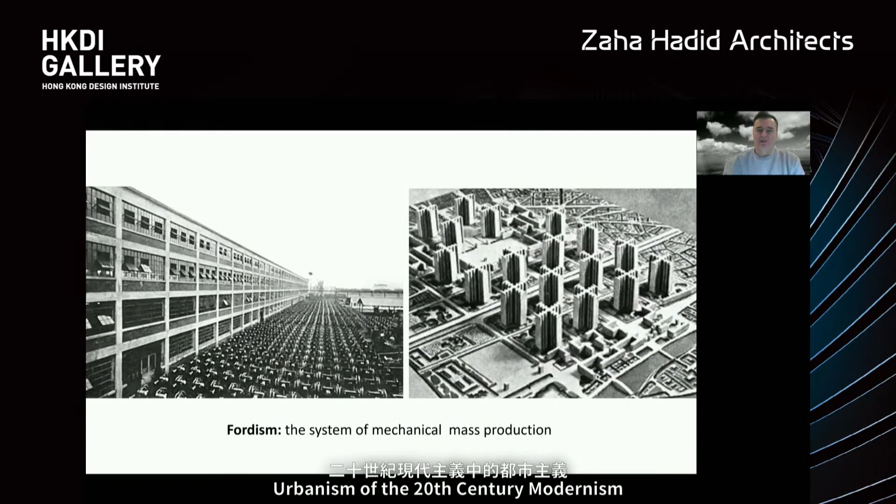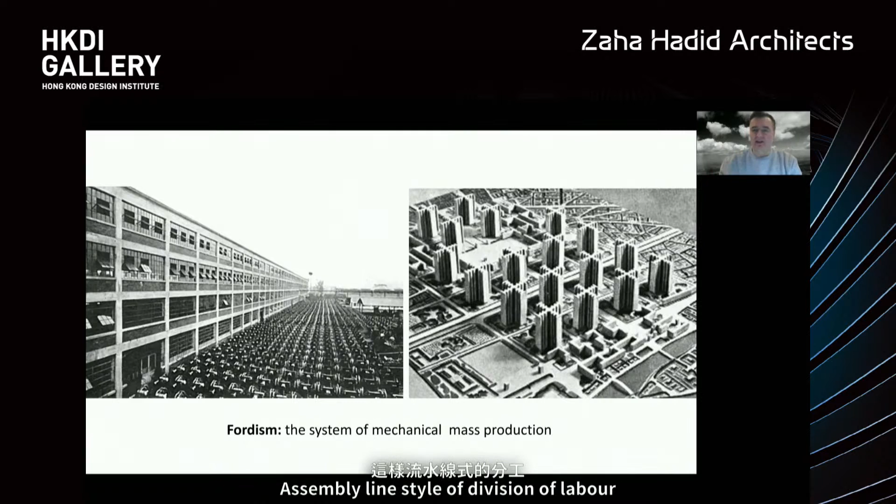Urbanism of the 20th century, modernism, was premised on the industrial city of mechanical mass production. It implied also zoning, separation, specialization, pulling apart the city fabric into specialist domains, because there was a very stable division of labor, an assembly-line style of division of labor, not only in the factory itself but also across domains and within administration, which led to this kind of model being viable and reproduced around the world.

And indeed, the vision of, for instance, a city for 3 million inhabitants, which Le Corbusier sketched in 1922, became reality around the world. For instance, you can see it in Moscow in the 70s, 80s, and 90s.

There's a stark contrast as we move from this era of, let's say, repetition and simplicity of organization, relatively speaking, to what happens now: complexity and agglomeration of individual statements in a place like, for instance, Moscow City.

It's a big difference, and the difference reflects a difference in socioeconomic dynamics and patterns of life and work and collaboration. So we're moving from that static hierarchy, which is bureaucratic, demarcating zones of competencies from a top-down hierarchy where every piece of information is channeled through hierarchical supervenient nodes, versus a network, which is much more about lateral flows of information and self-organizing of differentiated competencies.

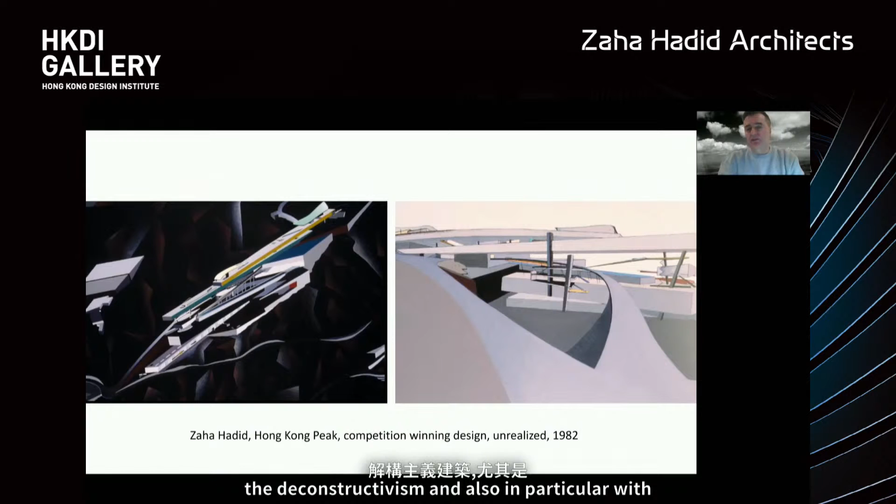These transformations started in the late 60s and into the 70s, and became quite prominent and prevalent and well reflected already in the early 80s. They also connect up meaningfully with the neoliberal transformations and revolutions of around 1980. Although these were not conscious elements, what was fascinating for me with the project of deconstructivism, and also particularly with Zaha's dynamic and complex work, was the anticipation of the kind of space which would fit such a situation.

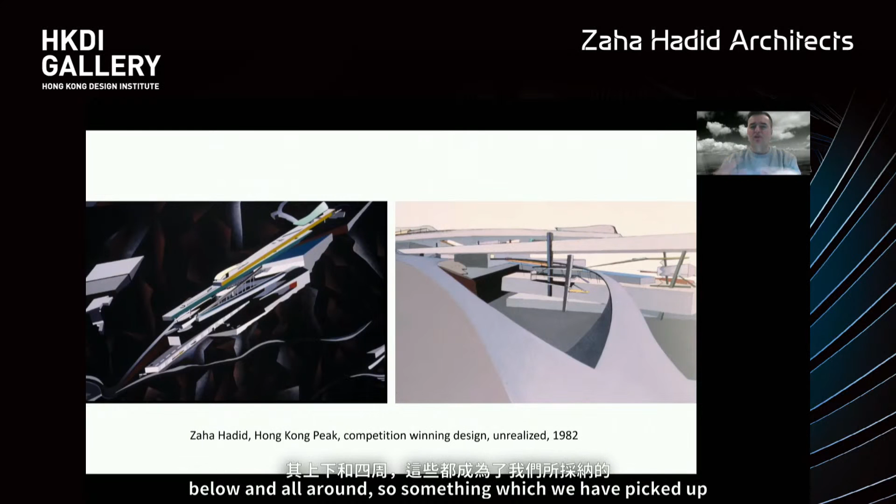Postmodernism already gave hints, an idea of postmodern space as a layered space, where old layers onto new layers onto old. But particularly here we're seeing nearly not a vertical urbanism, a horizontal skyscraper if you like, but the element which Zaha was most proud of and referring to continuously is this idea of a void, of intervisibility, interawareness, of flows, of movement, buildings that are porous, where there's offerings above, below, and all around. So something which we picked up and worked with also with vertical structures, where this became possible only later.

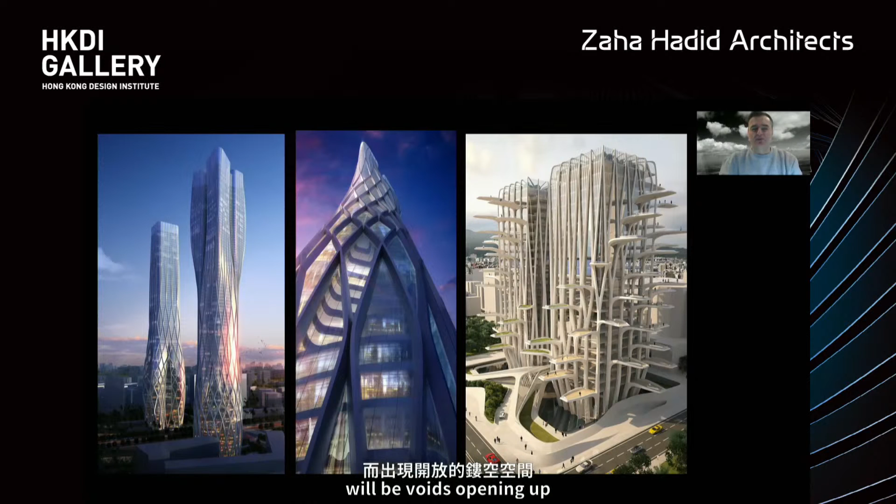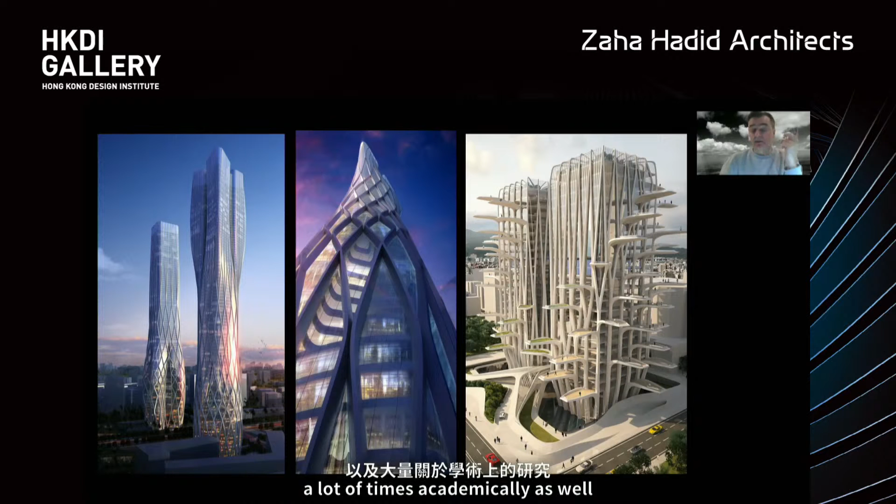So vertical urbanism means sometimes expressing structure, differentiating structure. Towers, the program isn't just extruded and stacked. So there will be different conditions, there will be voids opening up, and for that the structure needs to adapt and evolve and make space and be on the outside so the inside is more free. It's a hypothesis we've worked on a lot of times academically as well in the AA design research lab and elsewhere.

And so there's a number of those ideas, sometimes very tall towers, and you can see there's a differentiation between bottom, middle, and upper parts of the tower. They're quite different in the way the forces are accumulating, both vertical and horizontal forces, and that becomes also an opportunity, and this is reflected also in programming differently.

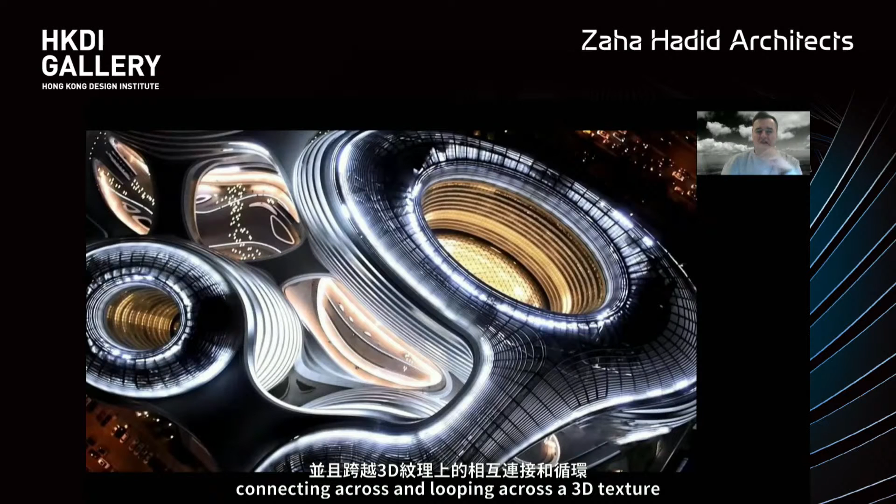And so Galaxy is that project in Beijing where it's maybe not super high, but it is a full-on three-dimensional urbanism with a lot of exterior public atria spaces, interior atria spaces, and bridging, connecting across and looping across a 3D texture that is, I think, quite an exemplary project we're still very proud of.

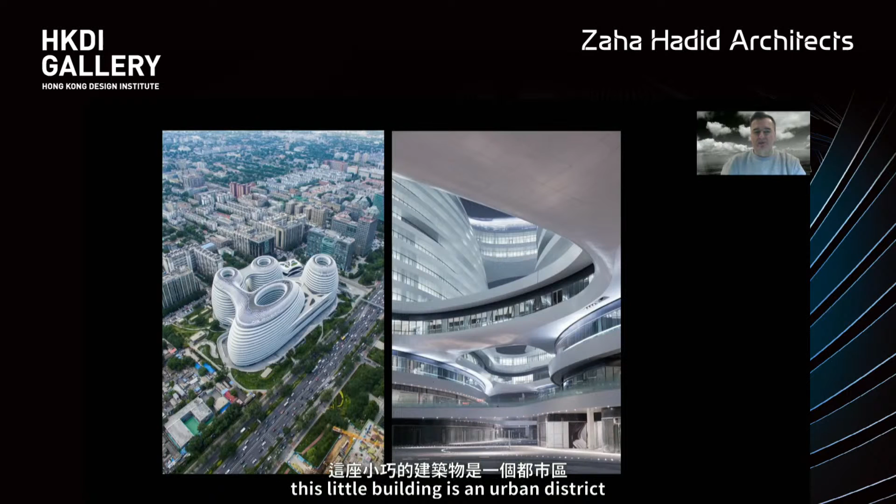Our own office, Beijing office, is located within this urban nugget, this little building is an urban district, interior urbanism, we also sometimes say. And you can see here the exterior space, the way it's stacked, the way vistas flow and activity is below, above, and all around.

Major urban plaza. There's co-working here. There's a lot of small companies, thousands of them, perhaps hundreds at least. There's a lot of cafes, bars, food and beverage offerings in the retail component, which is basically a social hub. There's also co-working zones embedded in the retail zones, and the various atriums, and we paid a lot of attention to openness, open vistas, intervisibility, awareness are the key themes.

And then with the same client, we made an attempt to create a larger cluster of towers. I only want to emphasize here the big atrium, because that's the theme which later came through—a big atrium which goes up the tower, but also opens up to the city.

Twin Tower project in Nanjing. Again, there is a big conferencing center and podium and three-dimensional urban plaza, interesting lobby and atria spaces on the inside, with big gathering spaces embedded in the podium, etc.

So these are our towers. We started actually with the first tower we ever built, in Marseille for a big shipping company. It was interesting, also bridging and connecting the horizontal building, and that level was used for seminars and meeting rooms, stacking up in the center where the plan became deeper, and by the blade kind of edge, with some elevators running up on the edge panoramically, and some atrium style spaces in the bridge level condition.

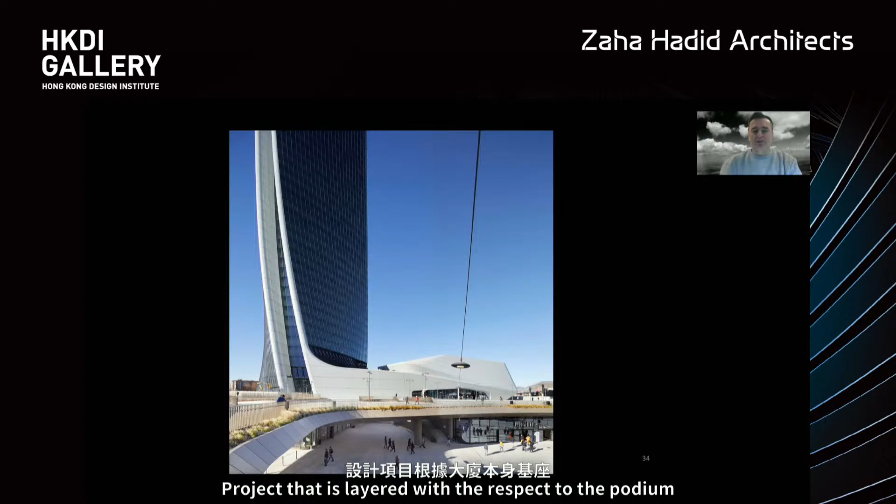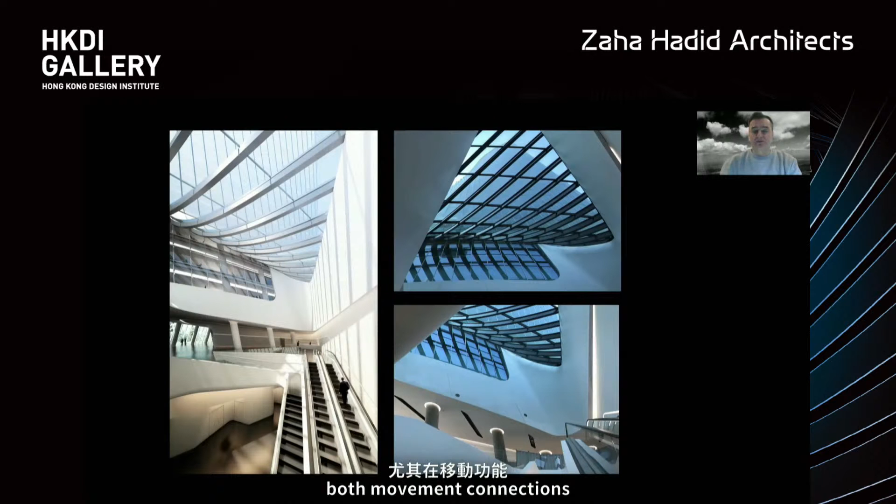Next tower, the Generali headquarters in Milan, connecting up with a retail condition and also connecting into residential quarters. The building twists to meet ground conditions and then to meet an internal axis lining up with the urban axis. Quite a dramatic project, but layered with respect to the podium, outdoor spaces, infrastructure, and the train stations close by connecting into us, with connections across sections, both movement connections and visual connections.

I was talking about structure and structural differentiation in our towers. This is in Miami, a residential tower. It has a series of activating elements: a strong activated ground with restaurant and lobbies, then a pool deck with amenity spaces, then residences on top, with another series of social spaces interspersing, and the rhythm of the structure gives also a differentiation into 3 flats, 2 flats, and a single flat on top.

And different balcony conditions, corner balconies, middle balconies, etc. The entrance has generous lobby spaces, and the pool deck, where the structure also reveals a series of intermittent niches and opportunities. Then moving up the tower, we're looking at the corner balcony, as well as the big large flats with a full stretch of frontal balcony overlooking the bay. Beautiful spaces where you can live as much on the terrace as in the interior.

The structure opens up and splits at the corner to open up vistas, and then a double height space at the very top for social gatherings and functions, with beautiful ceilings, a pool deck, and then connecting with air traffic through the helipads.

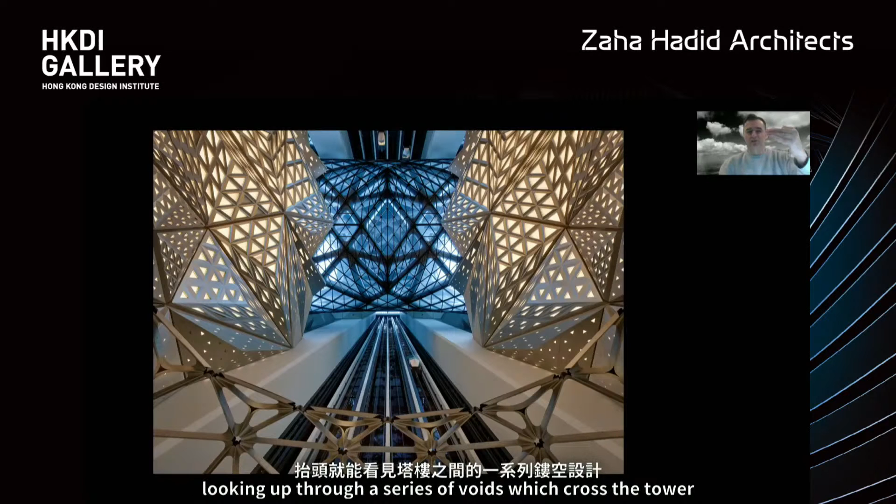Morpheus, a big hotel embedded in the City of Dreams in Macau. An exoskeleton allows for a lot of really spectacular interior atrium spaces stacked up, again with a lot of connections to the city. So our atriums are never fully interiorized. Panoramic elevators make it really a fantastic experience, looking up through a series of voids which cross the tower, with panoramic elevators on both sides, and then these amazing suspended platforms.

There's a restaurant, you only see part of it here, and there's another suspended space which is the breakfast room. All along, there are views and vistas across the towers into the urban condition. The breakfast room higher up, another view into the restaurant, and there's a gallery space as well, with a pool deck on top.

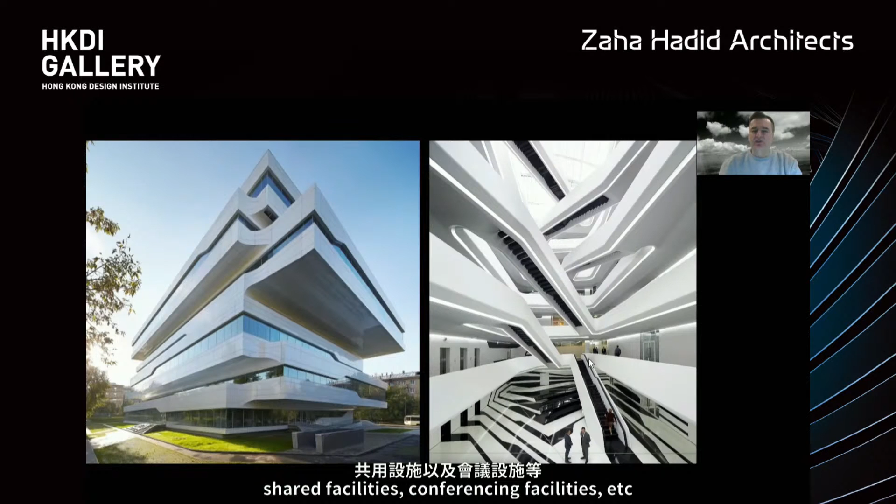I'm showing you everything. But we started also with smaller towers with this idea of an integrating, light-flooded atrium, where collaboration between different companies happens. It's not a single company, but one that creates network conditions here with wide corridors and shared facilities on the ground, conferencing facilities, etc. I think it's quite a striking, animate space as a work environment, very stimulating because it's networking for the network society.

And the mega atrium pushed another level with the Soho China Leeza Tower in South Beijing, where we again emphasize a lot of transparency into the urban, looking between the sides rather than being blocked by core, and having a series of bridges connecting in between as well. This interesting twist has to do, again, similar to the tower in Milan.

There is a cut through the basement, a train running through, so that's why we in fact have to split the tower to some extent, and then twist into the axis of the big road. So there's this kind of interesting mediation, but it also gives a lot of play and modulation to the surfaces, viewing up and down those three-dimensional surfaces where things tilt into view. It makes for not only excitement, but for more intervisibility, and a lot of transparency is achieved through that. These big urban windows are not just on one side, on both sides, so you sometimes see right through the tower, which I think is very exciting.

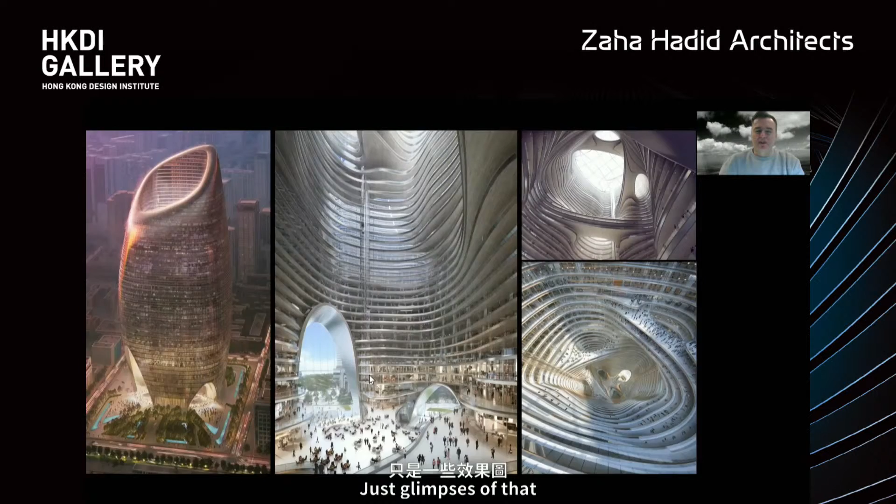Wow, so this was something. There's similar projects in our portfolio. This is for Taikang in Wuhan, a big conglomerate, where we experiment with this kind of scale of atrium. Just glimpses of that. There's a few more in our portfolio, unbuilt, but perhaps to be built.

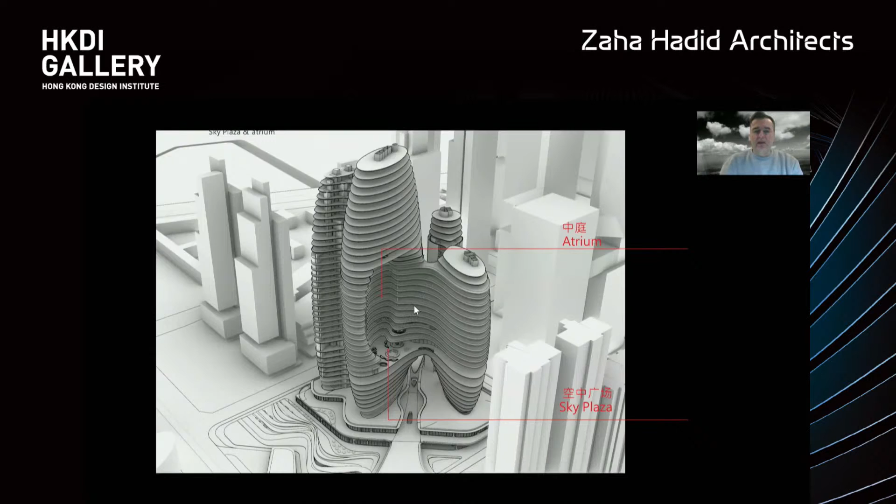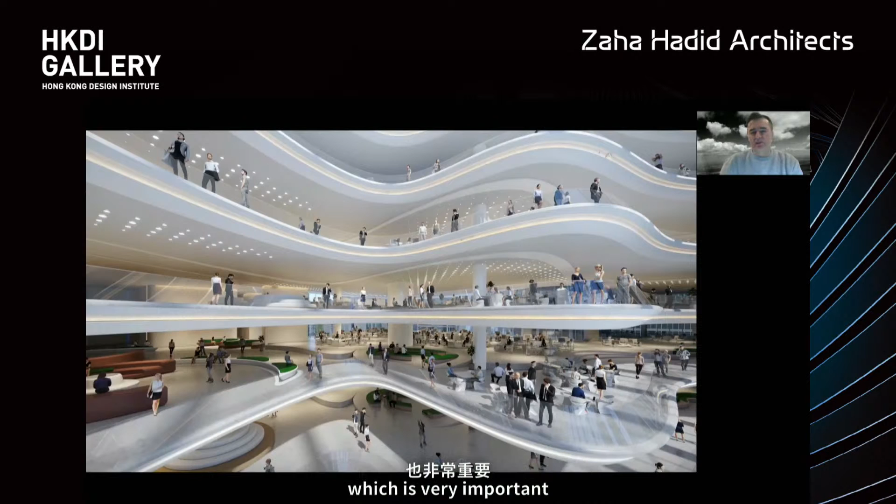This one is fascinating. It's a cluster of towers making one headquarters for Oppo in Shenzhen. One of the towers is actually purely circulatory, to open up the plate and not have the core, which we always say obstructs communication on the plate. We can then scoop out a big atrium and have the big views, big facades, true curtain walls, which are not clinging to each floor necessarily, and an amazing sense of openness and transparency.

This is very important, connecting up intervisibility, into awareness, networking, within larger companies with respect to departments and projects, or within buildings which host many companies which might cluster together according to their co-location synergy urges. And that's very important. Co-location synergies is really what brings cities together, agglomeration economies are not only about sharing amenities, it's really about collaboration, networking up, information exchange, and in fact project collaboration.

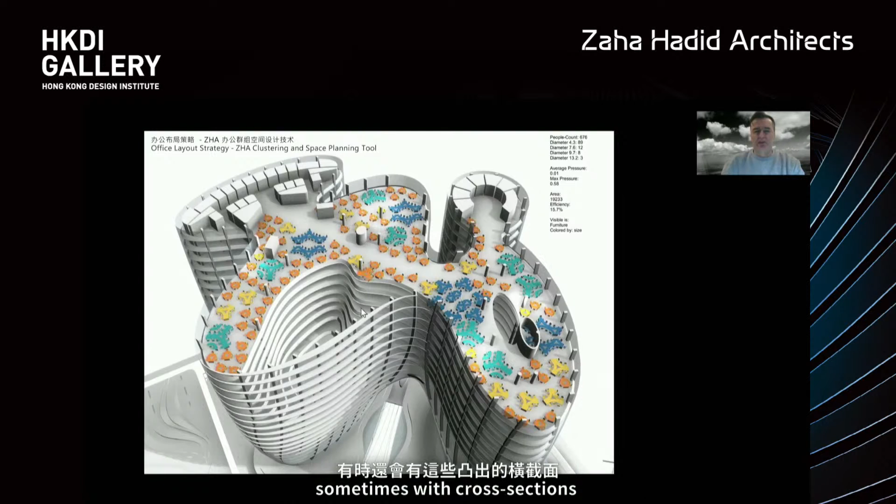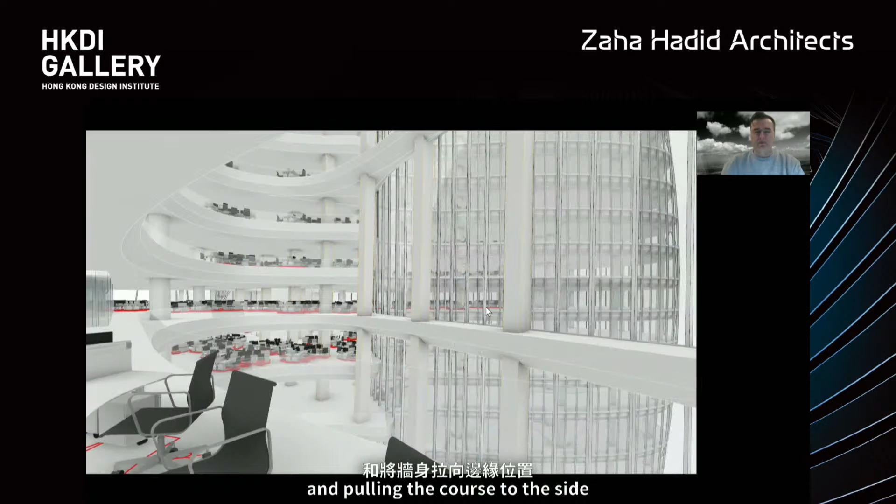So here you can see the total openness of that plate, sometimes with cross sections and pulling the cores to the side. Beautiful seamless facade.

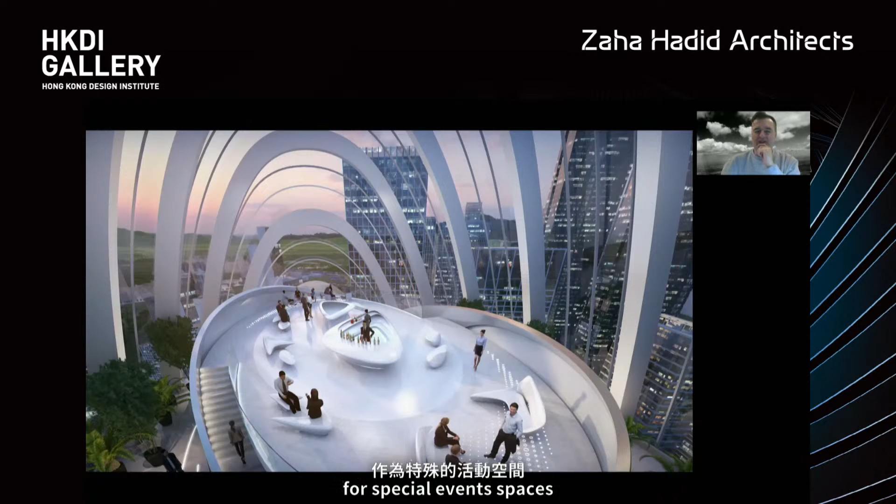Top of tower, I mean, we always exploit it for special event spaces with fantastic vistas. And we have several of these opportunities. One major one which we're going to exploit.

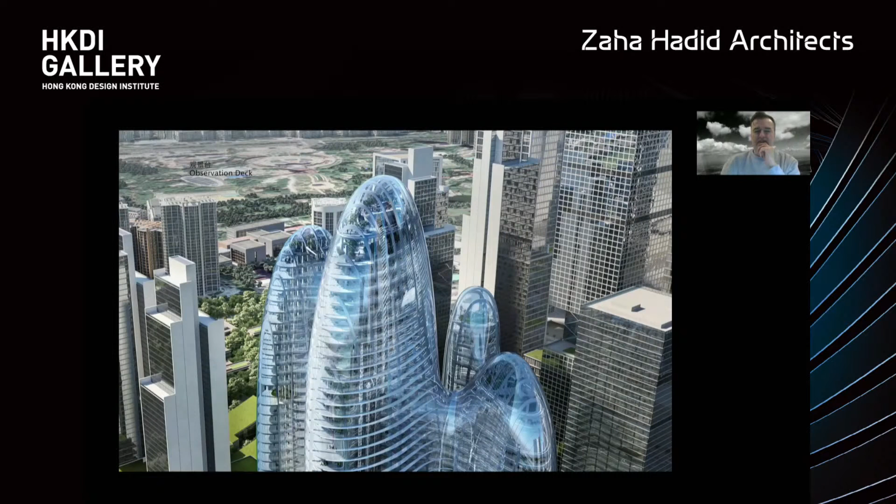This is an amazing tower, twin tower with a lot of bridging again and atria, but also terracing into the park with retail, food and beverages, places of exhibitions, spaces, galleries, cinema complex. It's a real city within the building, an interior urbanism, an urban building in the true sense.

Amazing project where we push into visibility, into awareness, and this idea of connecting up on multiple levels, not only on the ground, but also on mid-level. I think it's very important. And then top of tower again, very special occasions.

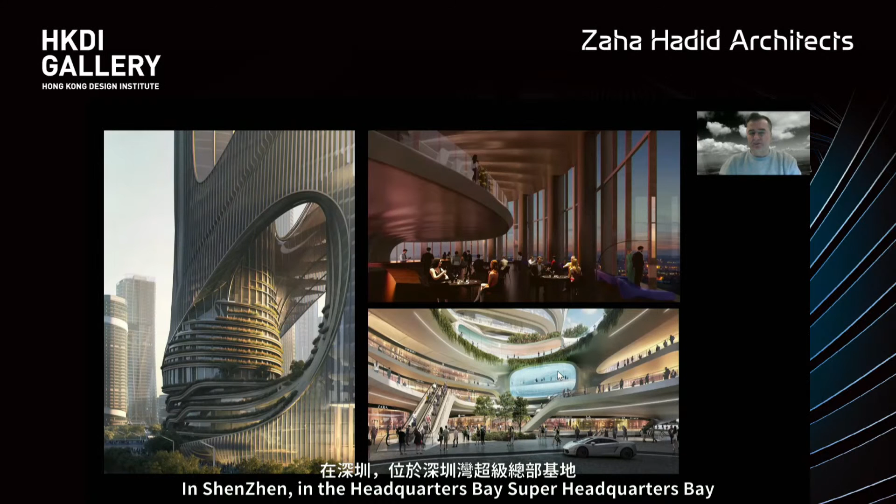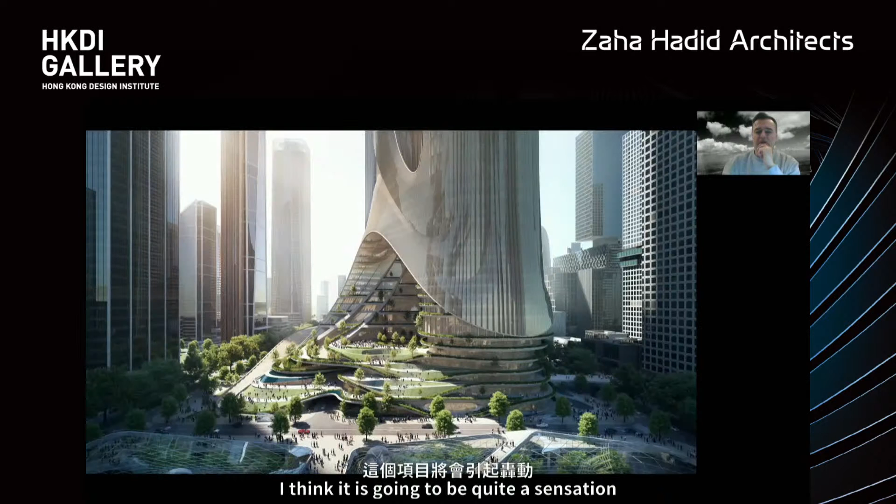In Shenzhen, in the headquarters bay, so super headquarters bay, also where Oppo is located. I think it's going to be quite a sensation.

Streets pulling through and in, you drop off and can move up the terrace on the outside or move through interior atrium access.

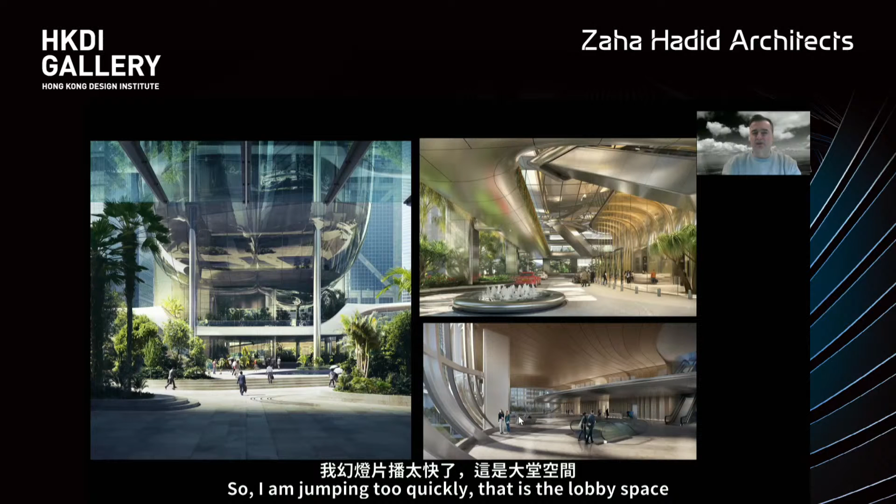So these are beautiful spaces. Sorry, I'm jumping too quickly. That's the lobby space, the drop off, and the bridge which connects into the urban network,

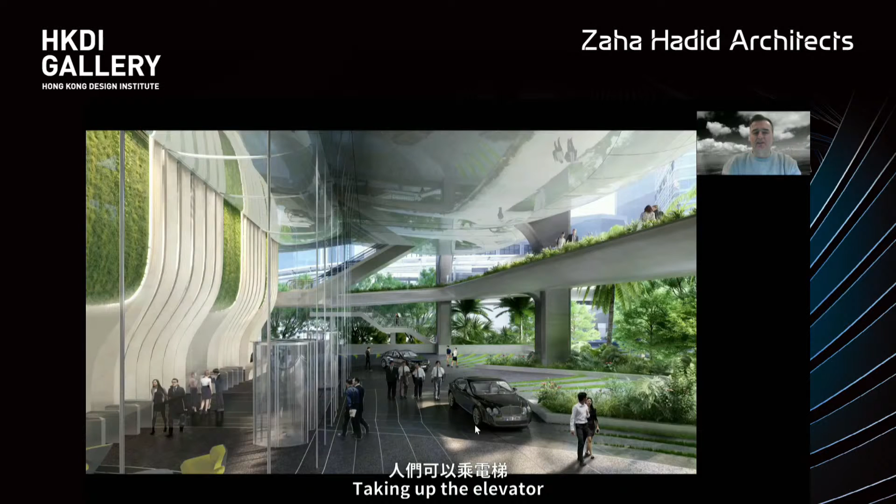taking up the elevator and coming up, or an escalator coming up to the double height large lobby with the balcony level again. So we can cascade up with escalators up to this point, and then take the elevator up to the levels,

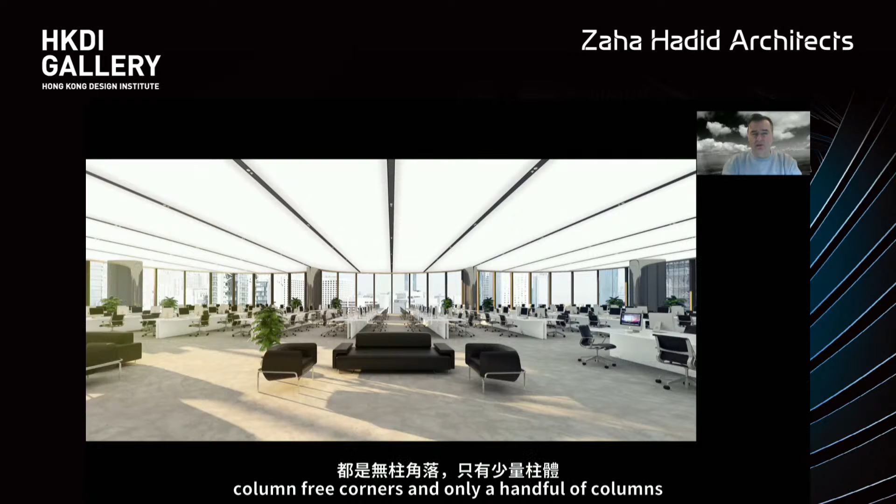which are really these amazing, just panoramic plates, because the core will be behind you, and there's an open vista and column-free corners, and only a handful of columns, mega columns, holding up the building.

Higher up, these recesses with green terraces, and at the top a fabulous event space, ballroom, with generous terraces, double height, glass roof, etc.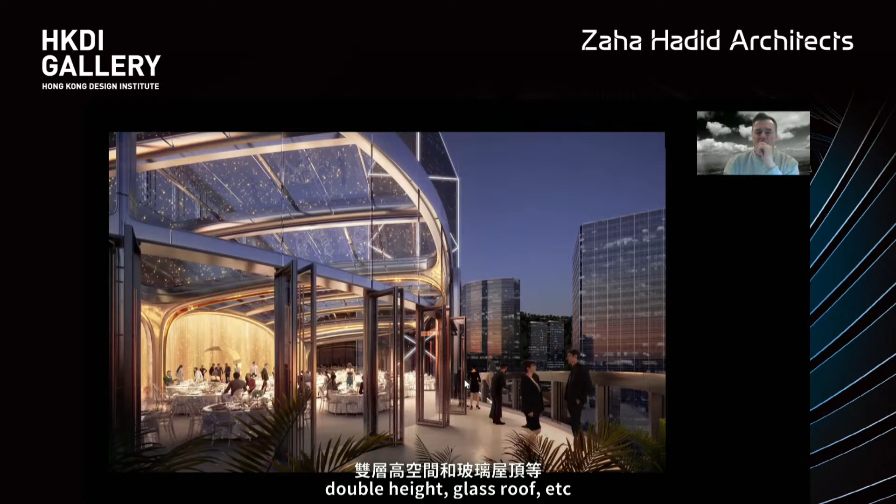Quite an addition in terms of a beautiful social space for Hong Kong, and that's the most central place. I think it will be the most popular and most sought after venue for special occasions in Hong Kong.

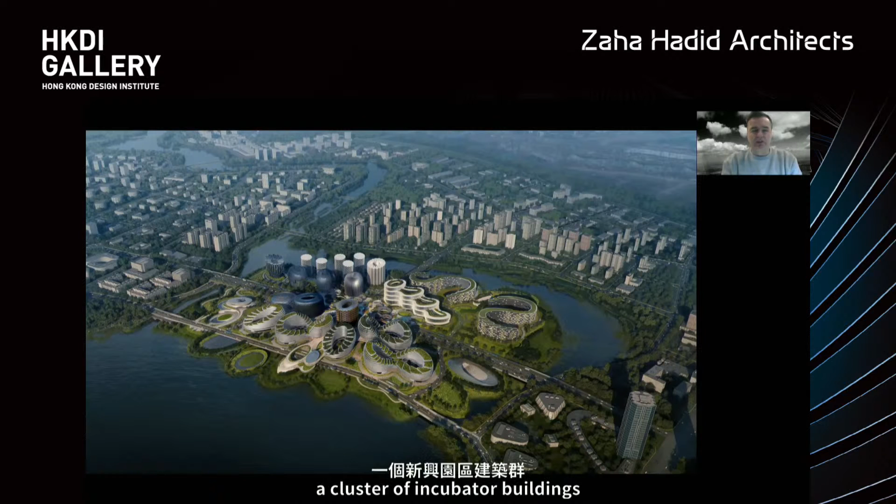Moving on to more urbanism proper, some of our sketches, and this is actually under construction now with a series of higher buildings, in fact, the so-called Unicorn Island in Chengdu, a cluster of incubator buildings for the tech industries, for startup companies with great potential.

There's also residences, there's a big urban plaza covering the road, so the site being dissected by a big road that just leads into underground parking, underground access, and a full-on pedestrian world on top.

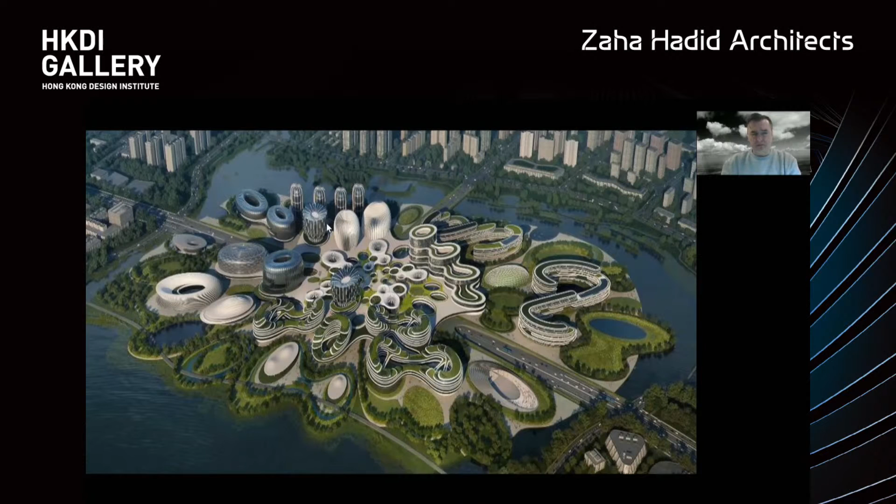First building built, an exhibition building, with a lot already under construction. So here you see it with taller towers pulling out now. The plaza is here. Some special buildings.

We try to do a lot of variety, the unity across difference, which has also an overall sense of unity through the overall centrifugal figure, but also through the cylinders and oval forms, and the terracing, for instance, which is a recurring feature which unifies

that project. It's very green. It's like a garden city, but much more dense than what one would expect to see under the heading of a garden city. But the green terracing makes it feel like a garden city, and also the proximity to the water,

I think, is compelling. And you can see here that there is a certain amount of density, but also a lot of beauty and activation through public spaces, green spaces.

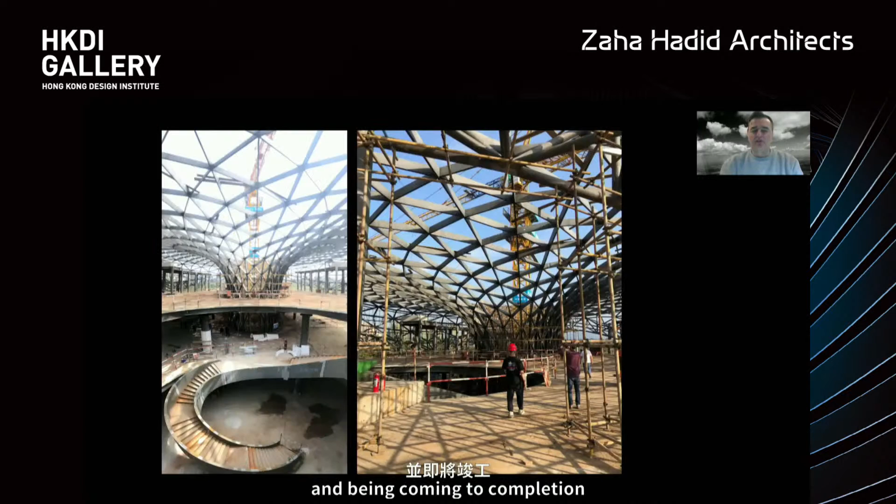The first building, as it was sketched, under construction, and coming to completion. These are not even the latest images. So there's a big exhibition pavilion to kick off basically the startup and unicorn village.

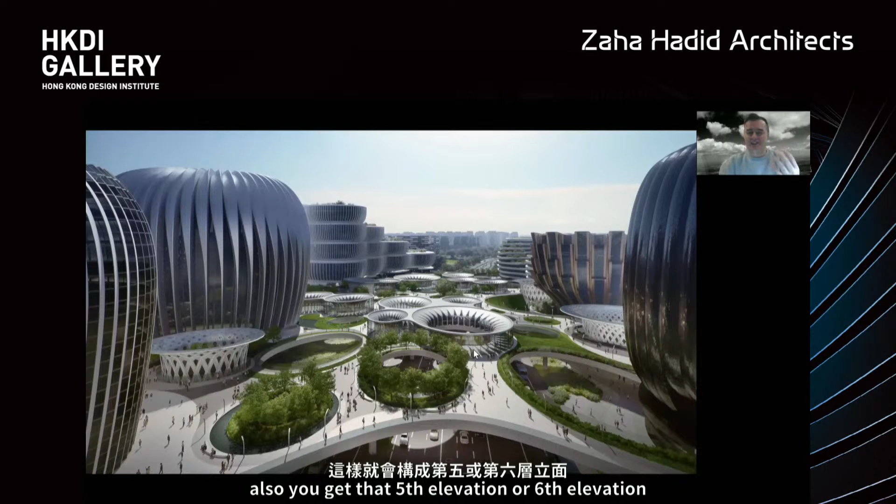Some beautiful spaces. And then the big urban plaza covering a lot of pavilion activation and some light wells as well, so that the street underneath isn't all dark. So you get that 5th elevation or 6th elevation, because you have an underside as well as a top view, as well as the 4 elevations.

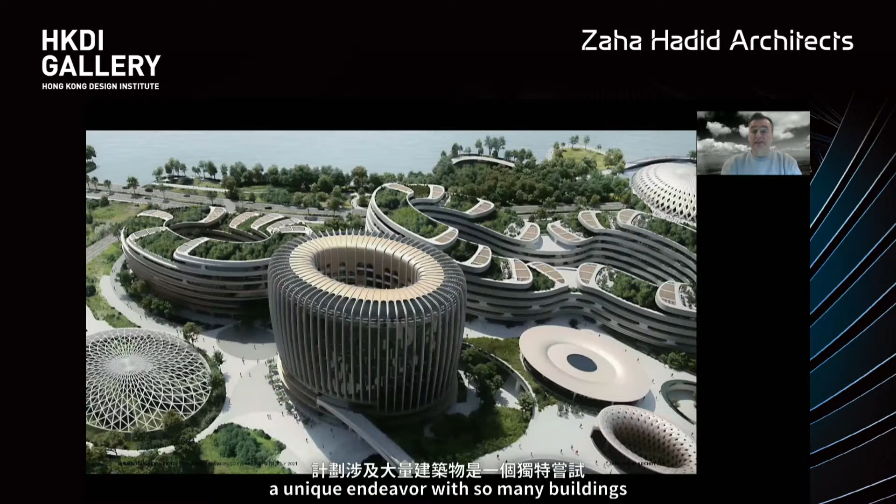So I think this is quite a unique endeavor with so many buildings, a big team trying to differentiate and have nuance and articulation. So differentiating residential from office building, from cultural buildings, etc., but having a lot of unity across all of that.

So it's a big effort, a unique effort so far, and I wanted to show this and also say anything larger would need multiple authors, but hopefully coordinated so there remains a unity across the variety, and not this kind of visual chaos where there's no unity and maybe a menacing kind of collision of styles and figures. So I want to finalize my talk with showing this work.

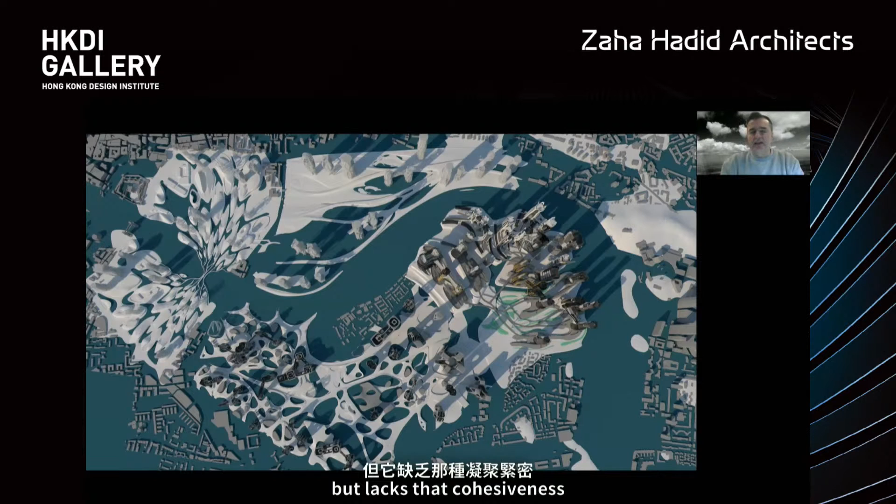It's the direct challenge to the City of London, which is in a way amazing, an intense cluster of vertical urbanism, but lacks that cohesiveness and becomes menacing and disorienting.

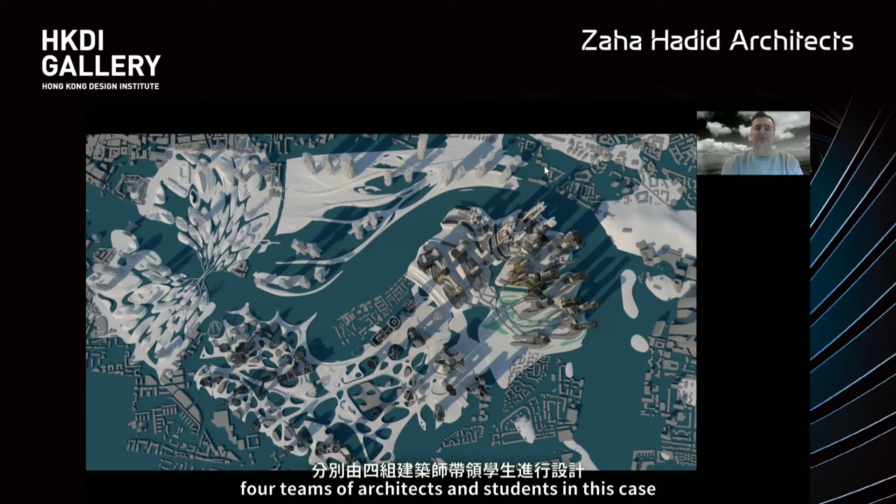So here's the attempt to take an even larger area, so nearly the whole area on both sides of the river between the City of London and Canary Wharf, the second financial center in London, and having a series of 4 sites with 4 teams of architects and students in this case, and operating across the river with an

intense 3-dimensional urbanism, which we'll show you, with the most intense activation of the ground plane, with towers which all have atria and exoskeletons and a lot of bridging between towers.

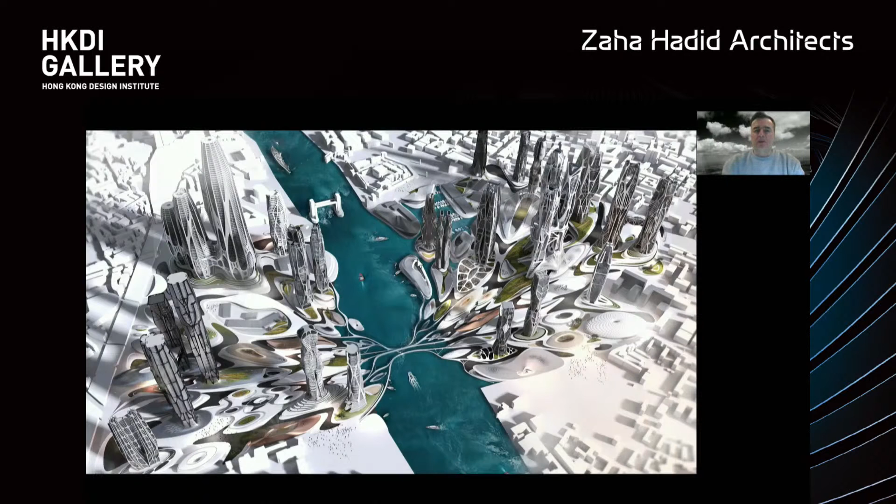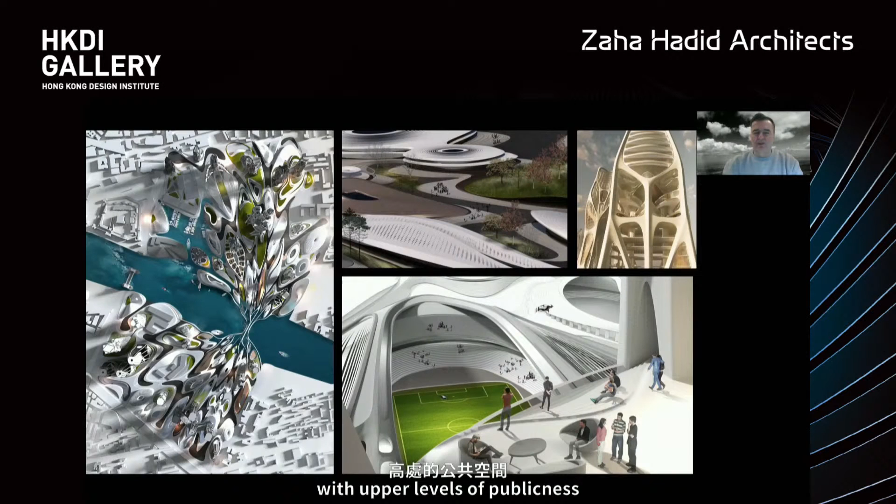So that's what I would call the new London, which we're creating here. You can see integration with stadia, with museums, with upper levels of publicness, not only have the public on the ground, but have it on mid-levels, on bridging, connecting levels.

So true vertical urbanism, 3D urbanism, as well as a series of penthouses, which are amazing. There's an attempt to have a lot of diversity, but also a lot of unity. The methodology of developing exoskeletons is to set the interiors free, developed with so-called topology optimization. These are not designed skeletons, but evolved through evolutionary optimization algorithms.

These are form-found, where you input load conditions, primary load conditions, and support points, and then within a bounding volume, the system develops optimal structurations. There's an interesting aspect where it can work with asymmetry, so if the bridge hits a building, that can be absorbed elegantly, or if the ground conditions aren't symmetrical, if there's something underneath which doesn't allow columns to be laid out symmetrically.

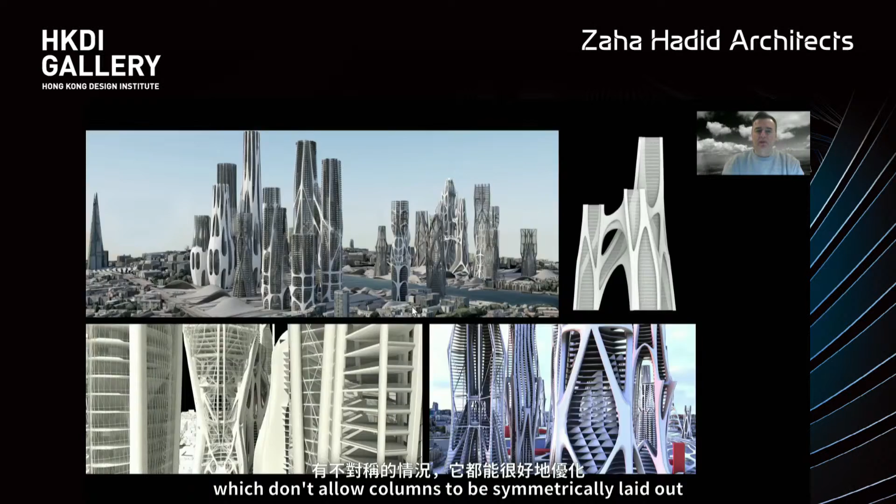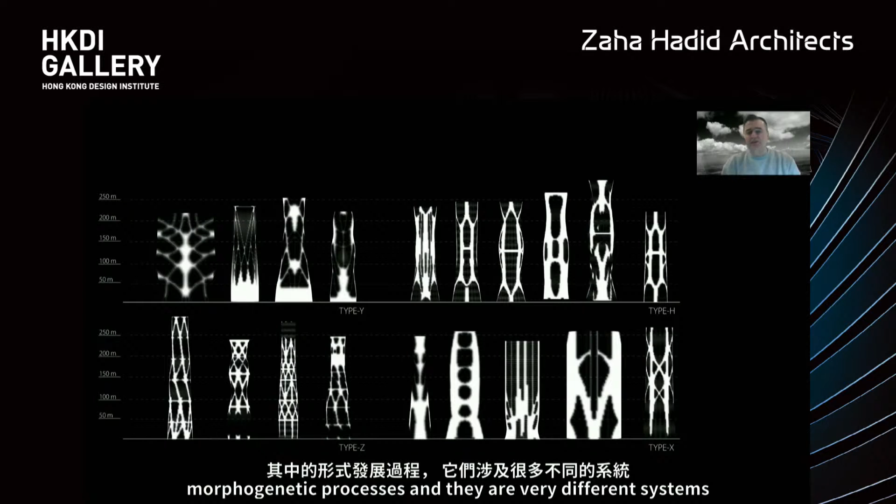So this is the overview, and this is some glimpse at the methodology of experimenting with these topology optimization morphogenetic processes, and they're very different systems - linear systems, mass erosion systems, different types of those.

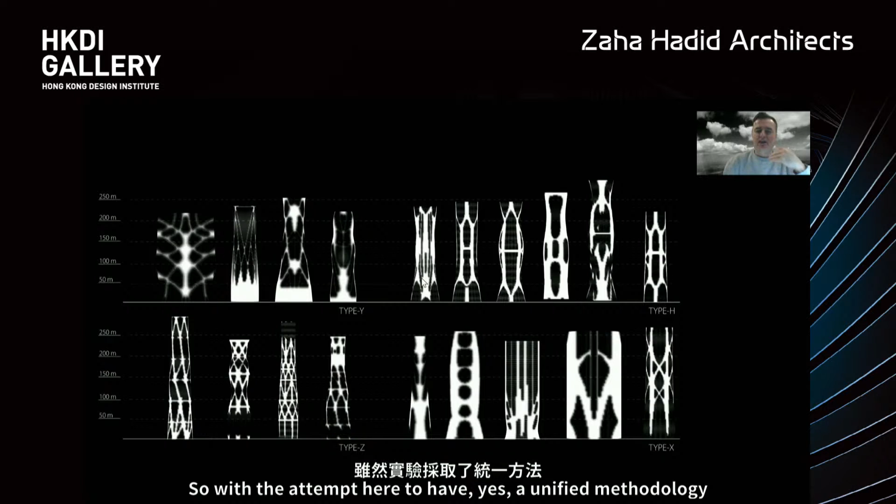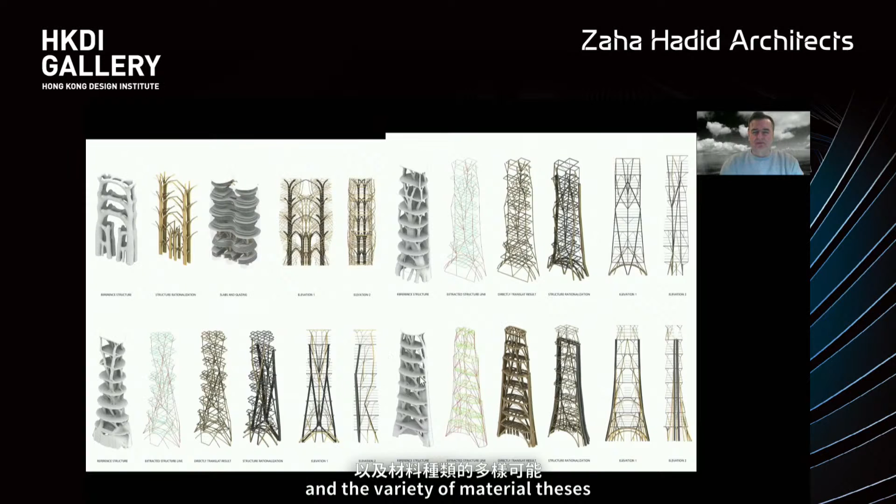And then there's also different translations with concrete, with timber, with steel. So the attempt here is to have a unified methodology, but sub-differentiations in terms of the particular tools, the particular optimization processes, as well as the translation, tectonic translation processes. So you can see the variety of structurations and the variety of material theses.

I will not go into any detail, but it gives you a sense of organic differentiation and variation and how this feels from the inside. Again, 4 different teams that work, each with 4 individual architects. So there's a lot of variety, but there's an enormous amount of unity because it's all parametricism, it's all tectonisms, even more particularly topology optimization techniques at play.

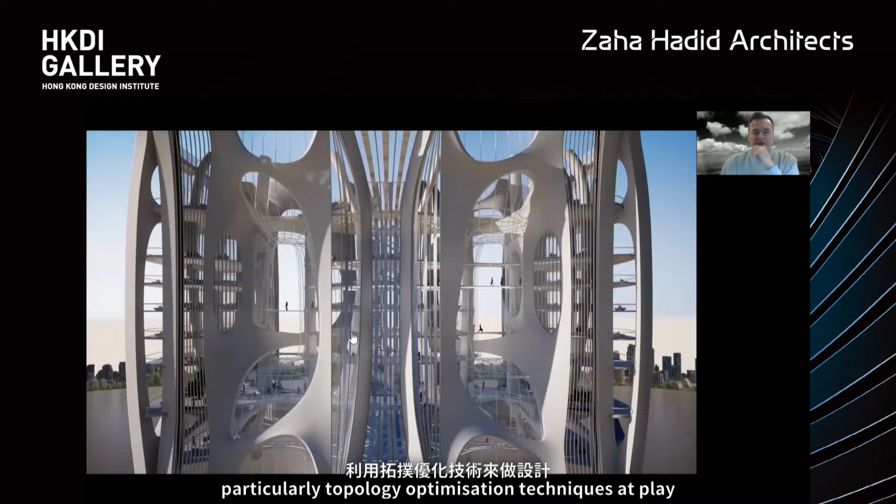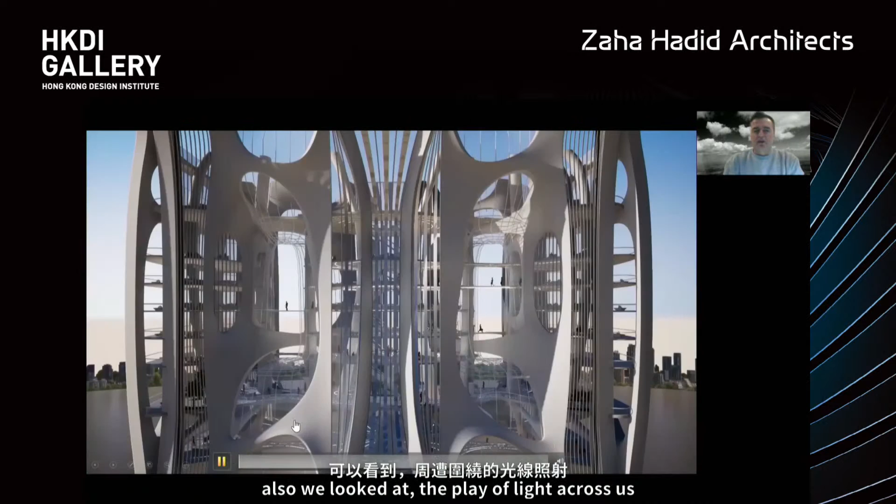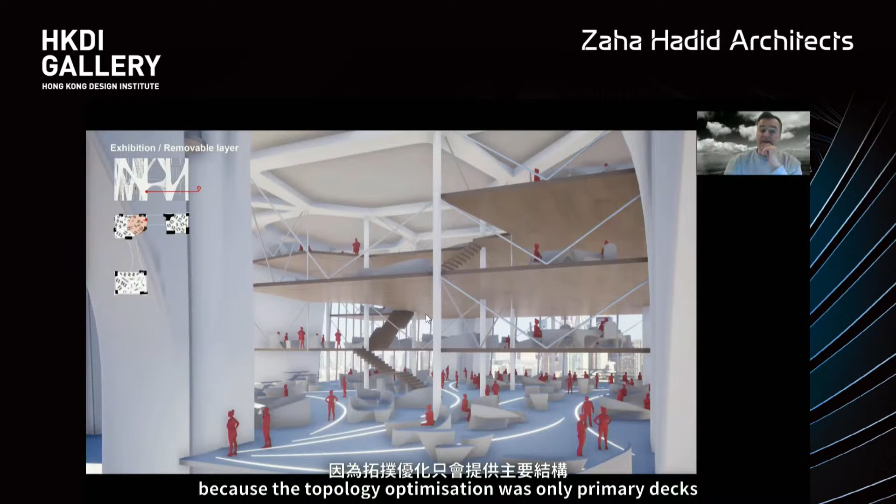There would be a series of animations where we looked at the play of light across this slightly unrealistic degree of openness and transparency. But in this case, the circulation is running on the outside or in columns, more dispersed to not have a very heavy central core. Subsidiary hanging structures, because the topology optimization was only primary - decks where we actually need the lateral structures to make an overall stability system.

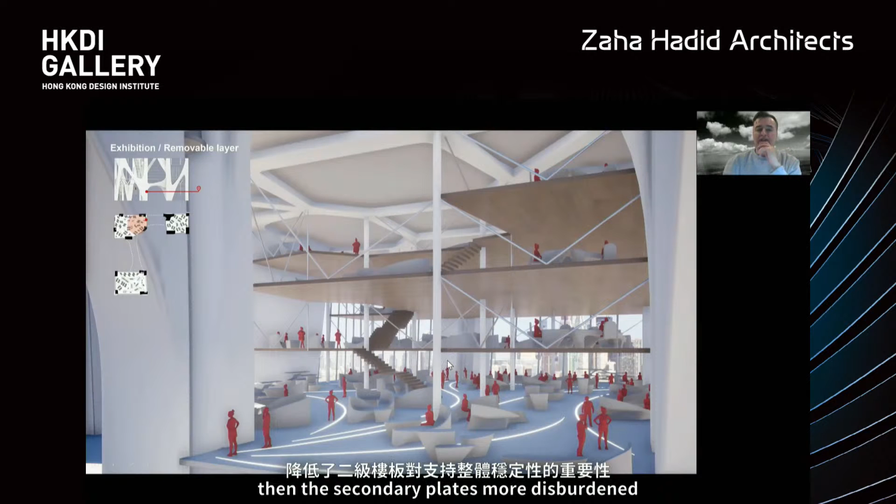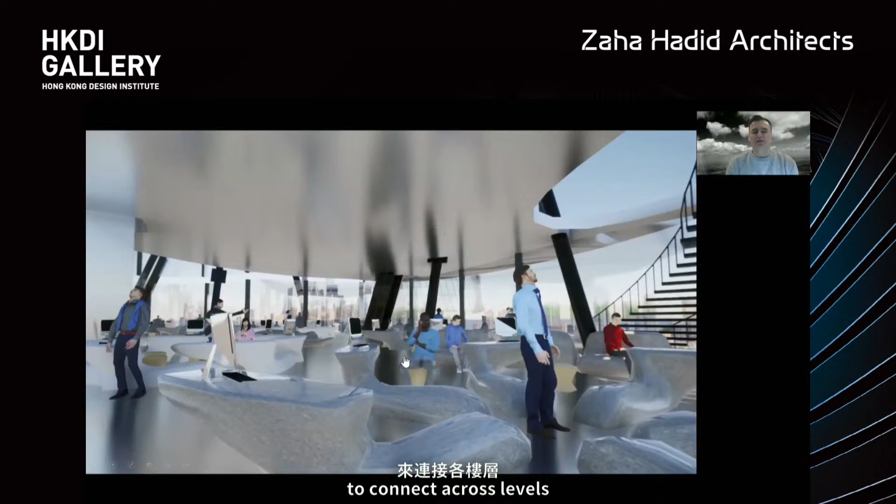And then have secondary plates more disburdened from overall stability work and being more free, hanging there so they could move around and reconfigure as well. Here's one of those steel versions where always there are these cross-sectional vistas to connect across levels, and an attempt to have a filigree structure, to have an optimized structure, no walls.

Or at least have several levels quite open, so a conference center or co-working zone embedded in a tower which is otherwise more striated.

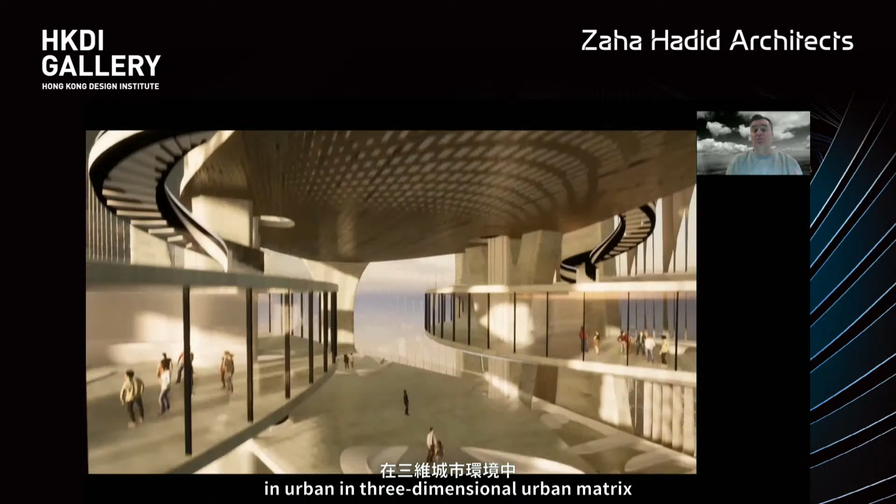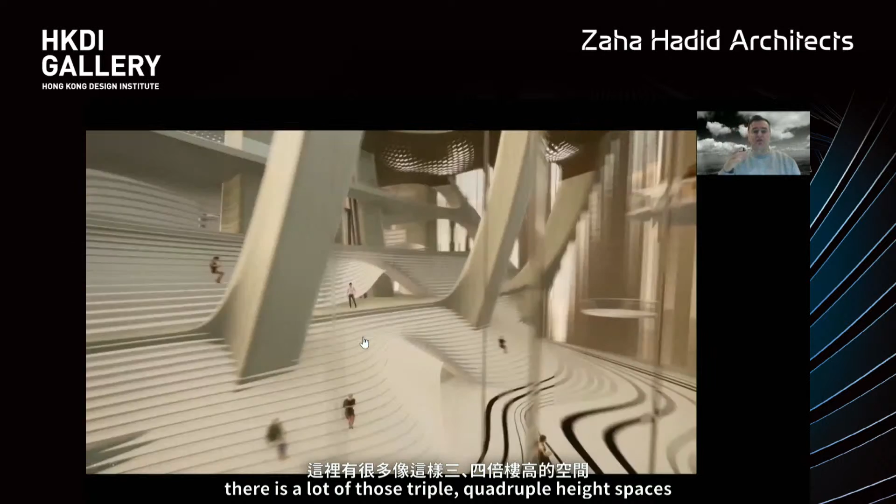And these pieces of architecture are located in a 3-dimensional urban matrix where they make sense, where they are at that datum. There's a lot of those triple and quadruple height spaces, which create sky lobbies, which operate across towers, across the district nearly. So it's an attempt to have architecture doing an urbanist work.

So again, congratulations to the group of students here under my leadership. I wanted to show that. And Zaha Hadid Architects and the AADRL have always been in close collaboration. You can sense that, how potent that is, I hope. And anyway, there's a little bit of future in here as well as all the build examples you've seen. Thank you for the attention. Let's hope we have an interesting debate.

So thank you a lot, Patrik. So thank you, you're giving me so great insight into the future of urbanism, not only vertically, but in a three-dimensional way. So I think it is always a human dream about high-rise tall buildings.

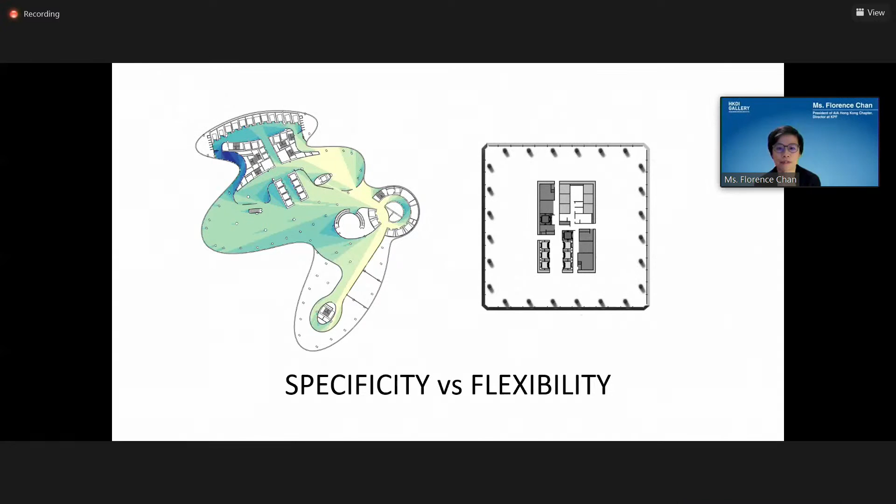Hi everyone. Thank you Hong Kong Design Institute, and also Zaha Hadid Architects for having me today. Very honored to be here with such distinguished panelists. Today's event is titled Vertical Urbanism. I think it's a very appropriate way to what I would characterize as Tower 2.0.

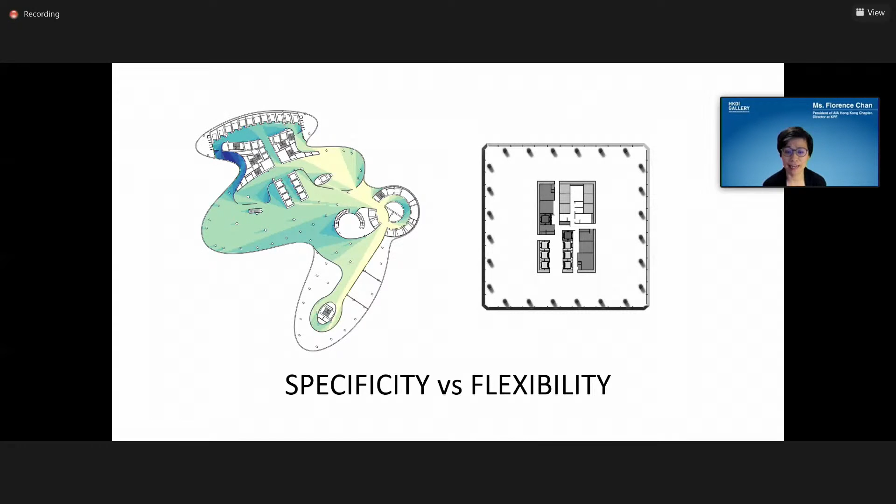What I mean is, for the past 100 years, as Michael has been saying, in terms of how we develop towers, a lot of the time it's repeated floor plans that keep repeating itself. I think Tower 2.0, or what we call vertical urbanism, is a way of living where people can actually inhabit a tower in which there are more different types of space, different variety of spatial experience that people can enjoy.

And I think what Patrik just showed us is one possibility of what it could be. In that particular aspect, as I am also an architect that practices a lot in designing towers, I want to focus on the specific requirement, meaning the specificity versus the flexibilities.

Because a lot of the time, if you think about doing a tower, you're kind of designing it to maybe 80%, meaning the remaining 20% is deferring to the future, for the future occupier to be using it. So in a way, flexibility has always been a big term and very important when designing towers. And as Patrik also mentioned in his presentation, how he was trying to push the structure to the perimeter in order to make the space more flexible - I think that is a very interesting concept.

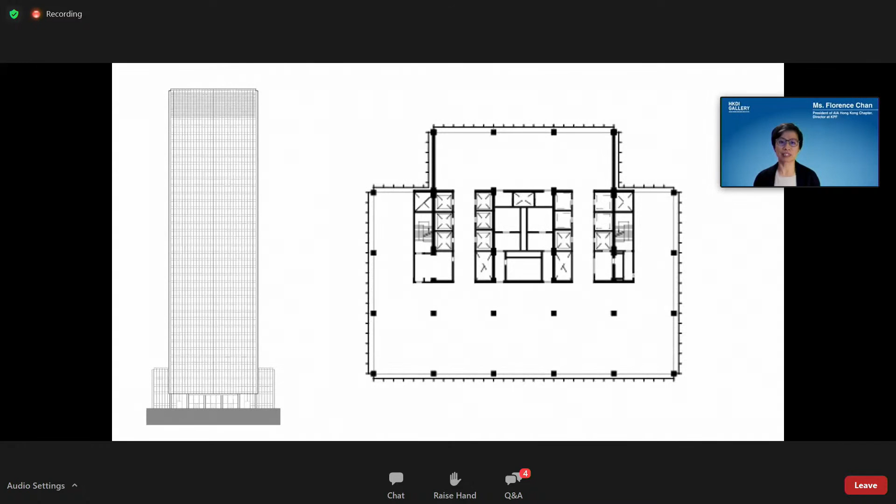Like in this case, the Seagram Tower - what you see is that a lot of the time it's really a rectangular box, even though formally it looks very rigid. However, it is this regularity that gives you the flexibility of usage. And that is where I think it's deviated from the past 2,000 years, when designing different types of architecture, a lot of the time especially with office towers, that indeterminacy during the design stage is where I think the flexibility comes in.

Like in this case, there can be different layouts, different scenarios as to how the space can be occupied. And I think that is where I found the idea of vertical urbanism is kind of challenging these notions of flexibility in a tower. For example, Patrik talks about introducing an atrium. By introducing an atrium, in a way you are also compromising the flexibility. Or by having a very fluid form, interestingly, you also have to balance how much flexibility you're going to have.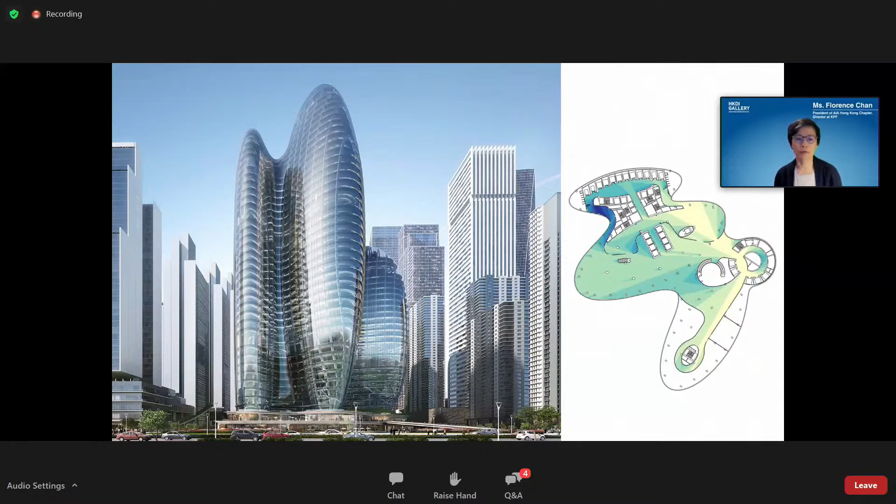So in that sense, I think in Tower 2.0 or vertical urbanism, a lot of the time it is really a close balance of how flexible versus how specific you want to go. And I would be interested, maybe in the later part of the discussion, to hear what the group thinks and where this is going.

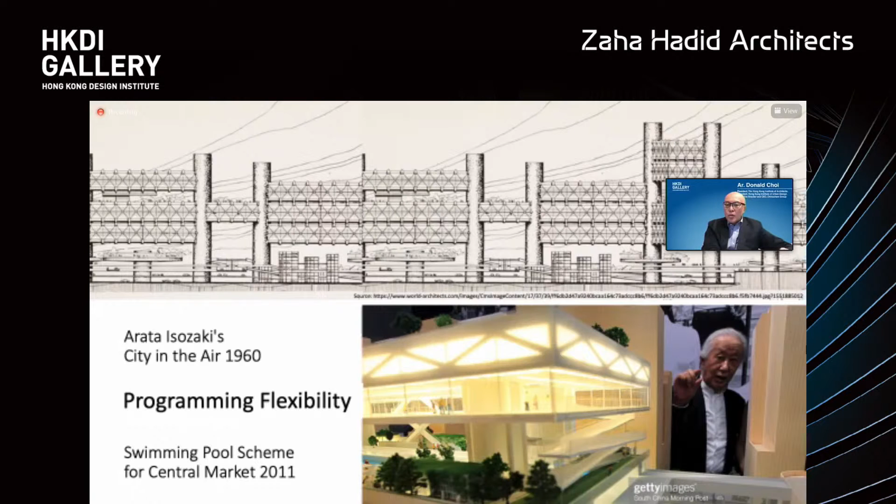I am optimistic that Hong Kong vertical urbanism, supported by high density, multi-level connectivity, and last but not least, a framework that allows mixed-use flexible programming, has the opportunity to become one of the 21st century's most desirable urban centers. Thank you.

Thank you, Donald. Definitely, I think starting from the hill towns in Italy to Isozaki to Patrik's ideas of vertical urbanism, multi-level connection and multi-level activities definitely live together with high-rise urbanism development. So thank you a lot.

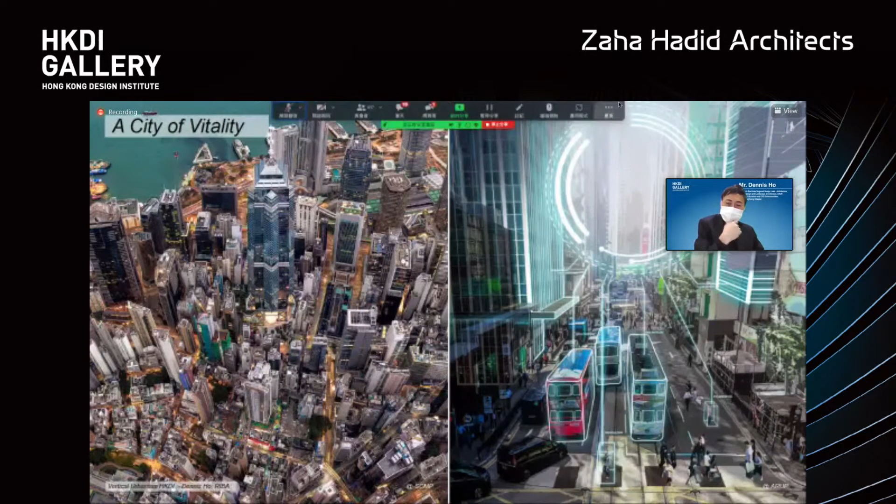Stay on the first slide, please. As mentioned, I think cities are getting much more complex, right? Partly because of our freedom in mobility, culture, lifestyles, and technologies. And to deal with these complexities these days, we are increasingly relying on new technologies, such as digital twins, AI, machine learning, to help us understand how to design and also how to grow our cities.

So first of all, I actually believe that in the future, we can no longer just consider or even design individual buildings, but we have to consider groups of buildings together and also their infrastructures in a more holistic manner. I think the vitality of the city and the opportunities will come from the successful integration of these different systems together, be they building fabric, transportation, open spaces, communications, or sustainability in a much, much wider context. So I think singularity on its own is probably not going to get us into the next era of vertical urbanism. Next slide, please.

And of course, vertical and compact cities like Hong Kong bring together people much more in terms of movement and exchange of knowledge and ideas. But it also brings along congestion, crowdedness, lack of personal space. I think we're all very familiar with it.

However, the new wave of mobility systems, such as AV, EV, UAM, will really allow us more freedom to interact and explore in many different ways. And I think our future buildings really must embrace these kind of new mobility strategies.

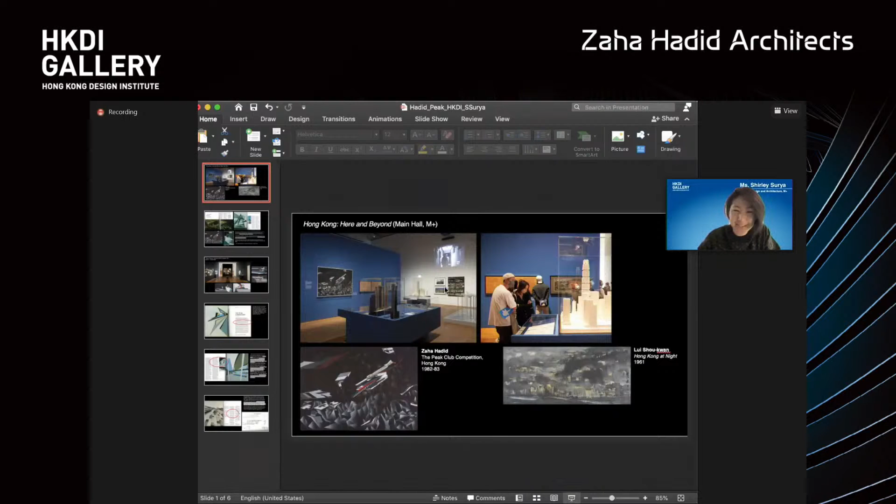Thank you, Michael, for the introduction, and thank you again, HKDI, for inviting me. This is a really large panel, and I feel a little bit out of place here because of all the eminent practitioners and academics in the field. So I'm going to be very clear that my perspective for these 5 minutes is purely going to come from a curatorial perspective and as a historian at the same time. And this largely has to do with the project everybody has been talking about, which is the genesis of Hadid's practice, but also her relationship with Hong Kong.

So I just wanted to share, as we are trying to display this work here, we could see in the Hong Kong Gallery, Hong Kong Here and Beyond at M+, the Peak Club competition, which of course other museums like MoMA also have. This is another version of the drawing. It's part of our collection, and we also acquired another set of drawings that are in the other room.

What I wanted to share is my own discovery, as we had to write the labels and understand more about this work. I realized, from an article in Vision magazine published in 1983 about the competition itself and the winning design, and from reading Zaha Hadid's entry essay for this competition, a few things were really revealed. I guess I just wanted to go back again to this first slide.

The reason why we placed this work within the section called Conditions, next to Lui Shou-kwan's painting called Hong Kong at Night — going back to what Dennis Ho had alluded to with Wucius Wong's painting — it's like from the artist's point of view, how to look at the city. I also felt, when we saw this work and read her essay, it was Hadid's very perceptive reading of Hong Kong, and her work became almost like a response that is counter to, but also aligned with, the spirit of what she interpreted the city to be. That's why we placed this work next to that painting.

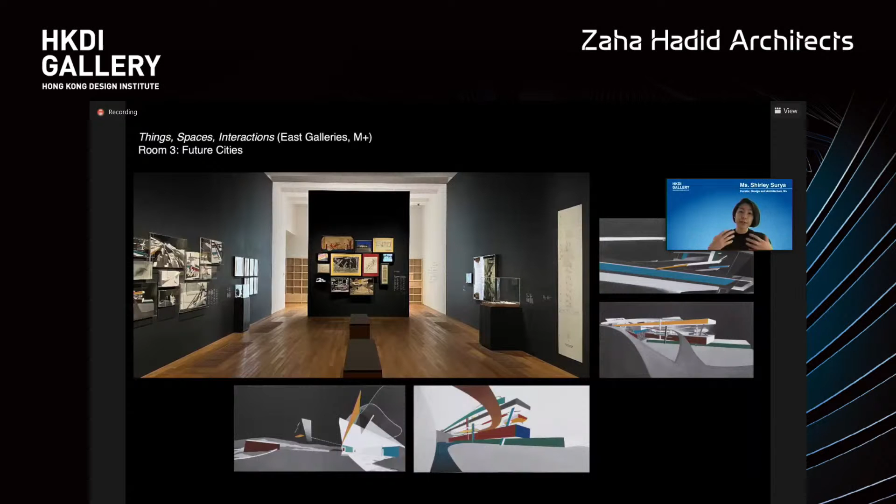At the same time, upon reading more of her article, this whole void she created is actually a kind of excavation of the site, and the material of the site itself is meant to be used to build parts of the building. This is something I would have missed if I hadn't read the essay—the sense of using materials dug from the site to form the building was not something often talked about within her scheme.

I wanted to highlight parts of it—how it defies nature but isn't trying to destroy it, and how the excavated rock itself is meant to create this man-made polished granite. So this whole relationship with nature and the topography of the Peak itself was very much a part of her intention.

Going further, this part of the essay goes into detail about how it's meant to be built. For me, it's so much more than an expression of architectural language—it's down to the detail of how this thing could actually be made.

It also relates much more closely to the site on the level of material and topography, but also on the level of what it means to relate to the urbanism seen below the peak itself. It's something worth reflecting on.

I guess the question is whether this is applicable to how we consider the future of so-called vertical urbanism today. I think it's just as relevant—this closer reading, not just replicating or being simplistic about what urbanism is, is very important. We need a more productive tension about what it means to embed ourselves in the environment, while also being inventive, even alien, in what we provide as something new, yet still relevant and able to activate existing conditions. That's my short reading and reflection on this.

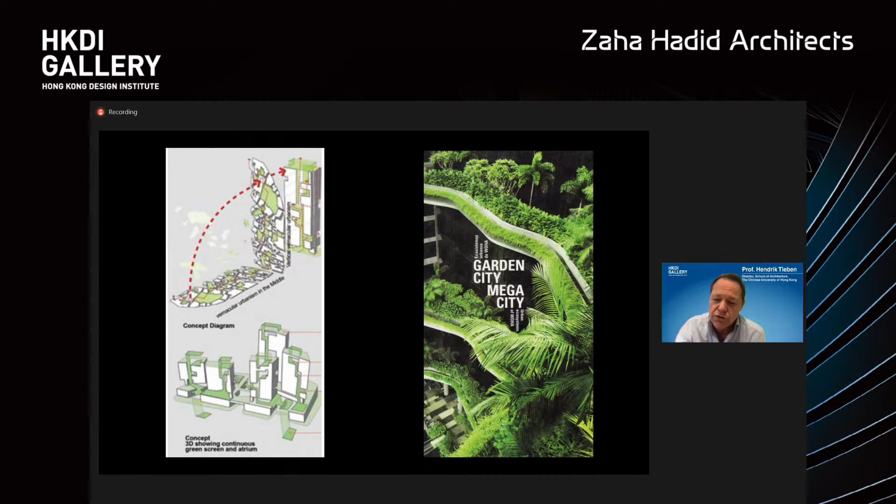I think Dennis was also alluding to it, and of course very much in the work of WOHA. And then those new projects we see, particularly in Singapore - many of those projects, but we all know this one probably, which is very successful in joining all kinds of public amenities into vertical urbanism. I made a note here because I think if we see this kind of richness, there's an opportunity for Hong Kong to use this to give access to the topography, to these amazing hills that we have. I think we could learn from all those contributions for Hong Kong.

So maybe I'll stop here.

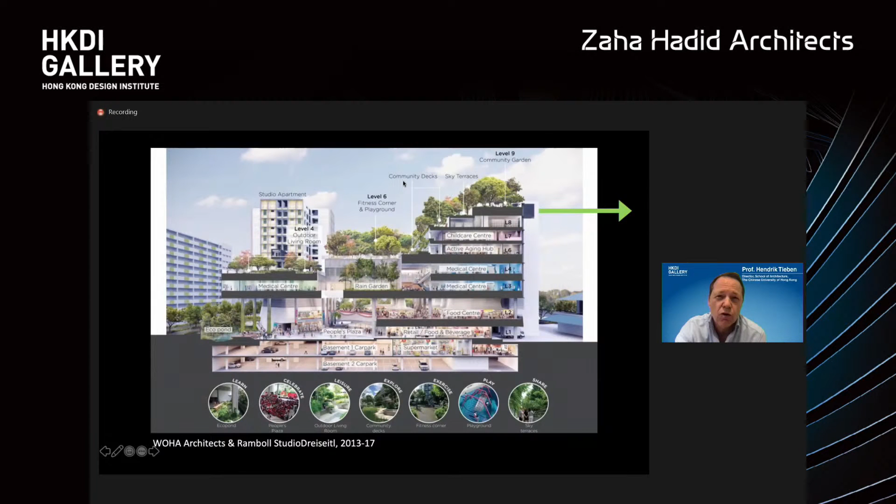Thank you very much. Thank you, Professor Tieben. Thank you for showing the book. Actually, I have a little article in the book that you showed at the beginning - I think it's from 20 to 30 years ago.

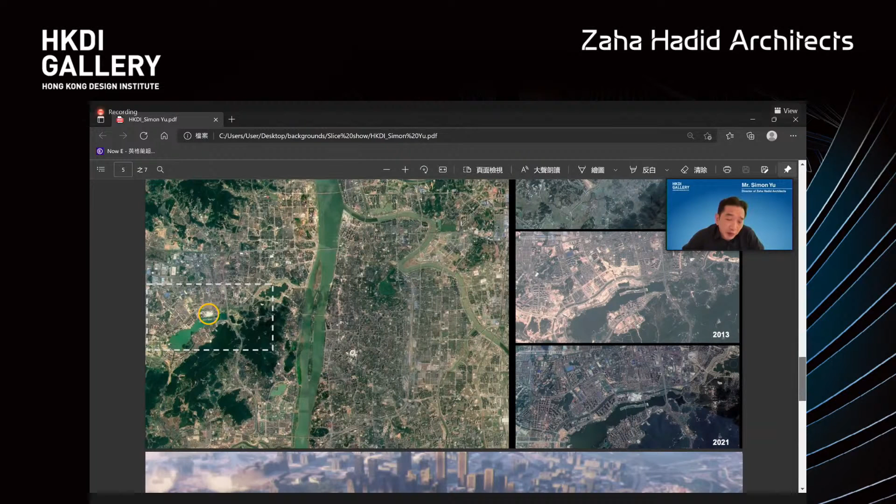Now let's move on, as I don't want to take too much time. With our individual projects and master plans, we talk about individual moves—things like sustainability and how we can move people. Mobility is a big topic too. I firmly believe the next battleground in technology is probably automobiles and travel.

But I picked this slide because when we talk about growth and development in China, at such a scale, we're not only talking about how we create individual buildings and certain techniques, but also how these buildings connect to each other. This is a project Patrik showed earlier—a TOD, a transport oriented development.

I'd shown previous master plans where, maybe 10 years ago, there was a big influx of cultural buildings stimulating migration into big cities in China, productions of course. But around these train stations and infrastructure, we're seeing a massive amount of interconnected development.